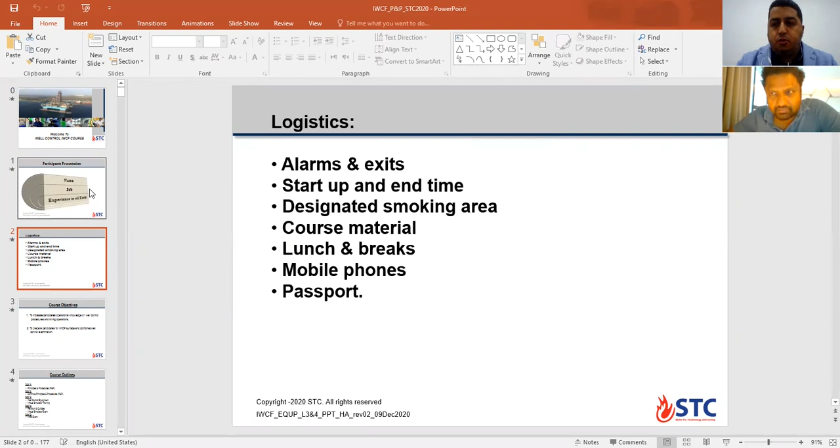What is the course objective? Why do we deliver or attend this course? First, to increase candidates' operational knowledge for well control procedure and killing operation: how to put the well under control, how to kill the well and resume our normal operation.

Second point, to prepare candidates for IWCF surface. Our course is talking about surface and combined well control examination.

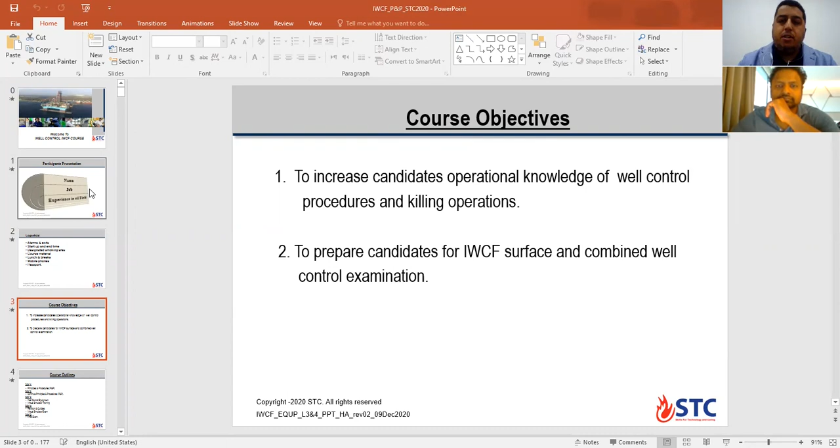Course outline: Day number 1, it will be today for principle and procedure. Day number 2, it will be continuing for principle and procedure. Day number 3, well control equipment. We will have virtual simulator training, well control simulator.

Day number 4, it will be revision and quizzes here in class, virtual simulator exam, and you have the simulator exam, you need to pass also with the same percent, 70%, to get your final certificate along with the written or online exam. Day number 5, the last day, it will be the final exam. And I think your exam will be online, right? Yes, it will be online.

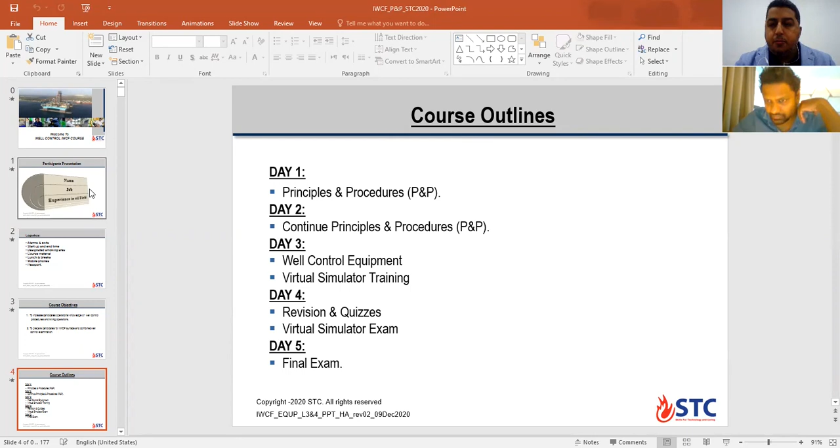First point, we'll talk about principle and procedure, well control barriers. Most of us, or you, are working on a drilling site or drilling rigs, so you know about what is the kick and the blowout. This is the definition, almost the most common definition you can hear at the rig site. What is the kick and what is the blowout?

What do you think? Kick is an influx, a blowout is an uncontrolled influx. Yes, thank you. Kick is an influx of formation fluid entering the wellbore and causing the well to start to flow. In this case, your formation fluid can be oil, can be gas, or a contamination mixture between oil and gas, or it can also be formation water. So the water can also be a kick.

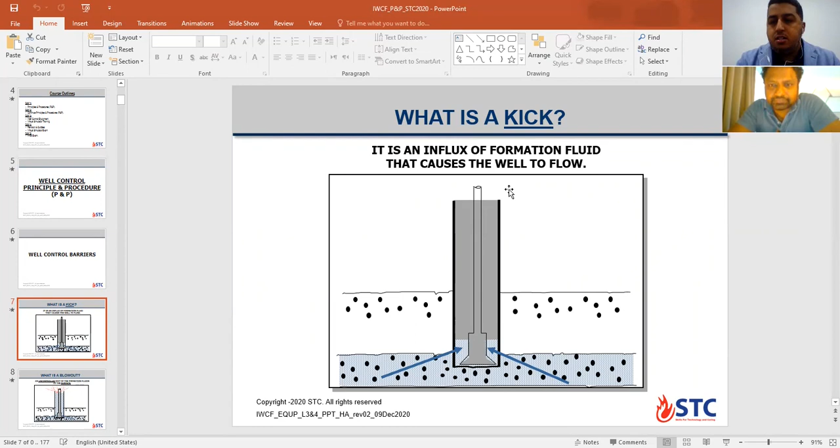Understood. Why does the fluid start to flow into the well? Because your hydrostatic head for the mud becomes less than the formation pressure. So the influx will be inside the wellbore, but still under control. So you can close your BOP stack at the surface, you can read the pressure at the surface, then you can convert this pressure to an increase in mud weight, and you start to kill the well.

The blowout is an exit of formation fluid reaching the surface, so it is out of control. It is an uncontrolled exit of formation fluid reaching the surface. You try to close your BOP stack, you have a failure in the BOP stack to control the pressure, so the oil and gas reach the surface without control. In this case, it is called a blowout case.

Normally, not all kick situations can lead to a blowout. According to experience in the oil field, only 10% of kicks, if not dealt with or handled properly, can result in a blowout. The most notable blowout in almost 11 years was the disaster in the Gulf of Mexico, the Deepwater Horizon semi-submersible.

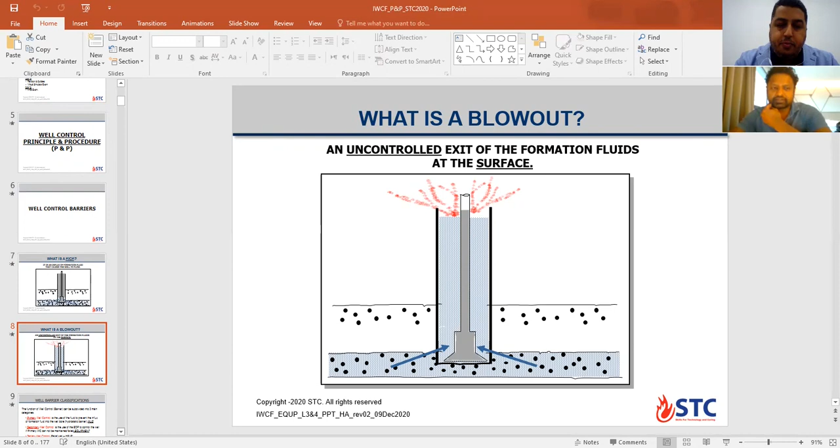What is the barrier classification? Here we talk about barrier, something that can prevent flow from the formation. It can be divided into three main categories.

First category, primary well control barrier, which is the fluid or drilling mud that prevents the influx from the formation coming inside the well. This is called fluid barrier or hydrostatic barrier. Usually when drilling with mud, the weight or hydrostatic head of the mud gives you pressure higher than your formation pressure.

By minimum, according to API, American Petroleum Institute regulations, you need a minimum of 200 PSI over balance. In some company policies, they put more than 200 PSI depending on depth of the well, porosity and permeability of the formation, type of well, deviation, temperature downhole, and a lot of considerations.

If the primary well control barrier fails, you switch to control the well with the secondary well control barrier. This piece of equipment is called BOP, or blowout preventer. You will shut in with pipe ram or annular to stop the flow and control the kick. At that moment, you record pressures at surface and convert these pressures to mud weight, increase your system with kill fluid, and start to kill the well with one of the killing methods we'll talk about later.

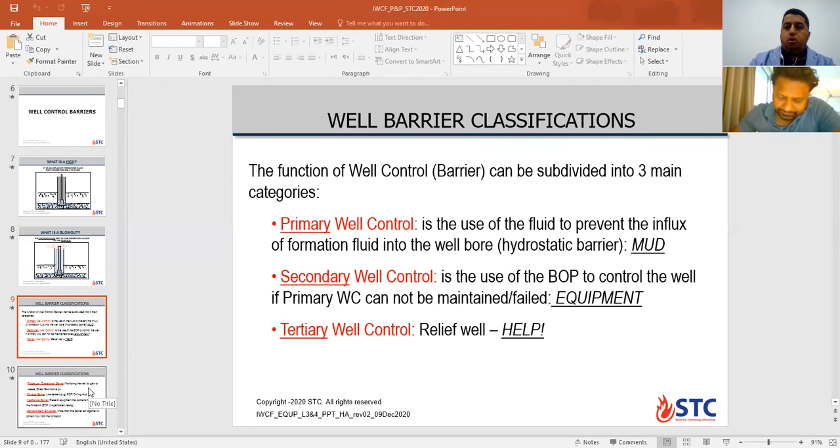Here's another classification, called procedure or operational barrier. When you monitor the well for any gain or loss inside your tanks, checking active or gain in the tank, this is called operational or procedure barrier for your mud system.

Physical barrier, from its name, is something you can see or touch physically, like a cement plug, BOP, or drilling mud, if you can see it at the surface and the level is static. Mechanical barrier is a piece of equipment that contains the flow from the formation, like BOP or unperforated casing.

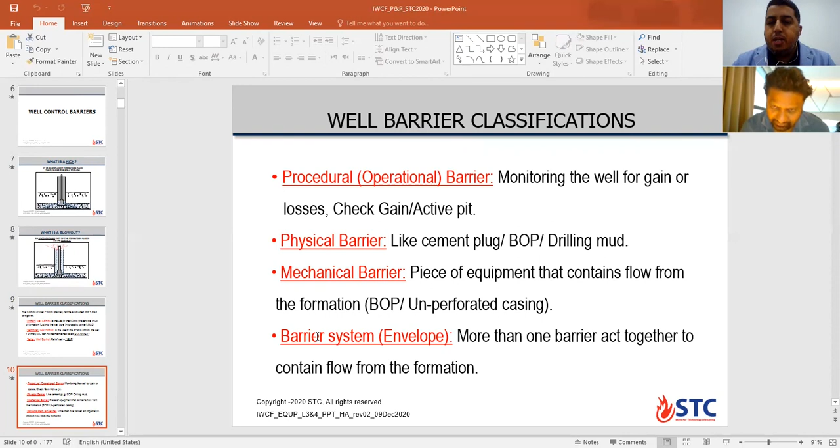Barrier envelope, what is the barrier envelope? This is a combination of more than one barrier acting together to contain the flow from the formation. Like when drilling, you have the hydrostatic head of the mud, and you have BOP as secondary barrier. The same applies if you need to, for example, change the ram in the BOP. So you need to have one mechanical barrier plus your hydrostatic head for the mud. In some companies, they add more barriers. This is the minimum requirement for barriers in place.

How can we pressure test the barrier? The barrier will not be acceptable until it passes the test criteria or test requirement to be considered a barrier. The BOP on the rig, if placed above the wellhead, cannot be considered a barrier until it passes the test procedures.

What is the way to pressure test the barrier? You have two pressure test types: one called positive test, and another called negative test. The positive test, you apply an external source pressure on the surface side of the barrier, like a cement block or BOP, more than from the bottom, from the formation side.

At that time, your surface pressure plus your hydrostatic head column above the cement block in the well will be more than the formation pressure. So this way is called a positive test. You need to hold the pressure for at least 10 or 15 minutes on the chart to ensure the barrier is holding, so you can continue your operation.

In the other way, the negative test, sometimes called an inflow test, or in some companies a dry test, you do the reverse. You apply pressure from the formation side, which will be higher than the hydrostatic head of the mud above the barrier. So this type is called negative test.

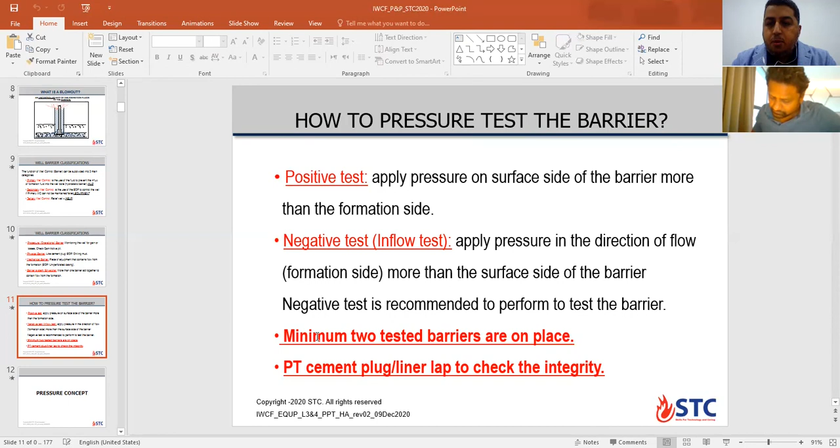We'll move to talk about pressure concepts. What is the pressure we need to talk about? First, we'll talk about hydrostatic pressure, HP. The hydrostatic pressure equation, the units for this course, pressure will be in PSI, pound per square inch, equal to mud weight in PPG, pound per gallon, times TVD, true vertical depth, times factor K, which is 0.052. This equation you will find in your formula sheet.

Could you check your formula sheet? This is the first equation in the formula sheet, first page, number 1. Equation number 1, yes. Hold on. Yes, correct, number 1. Okay, number 1 in the formula sheet: pressure equals 0.052 times TVD in feet times mud density.

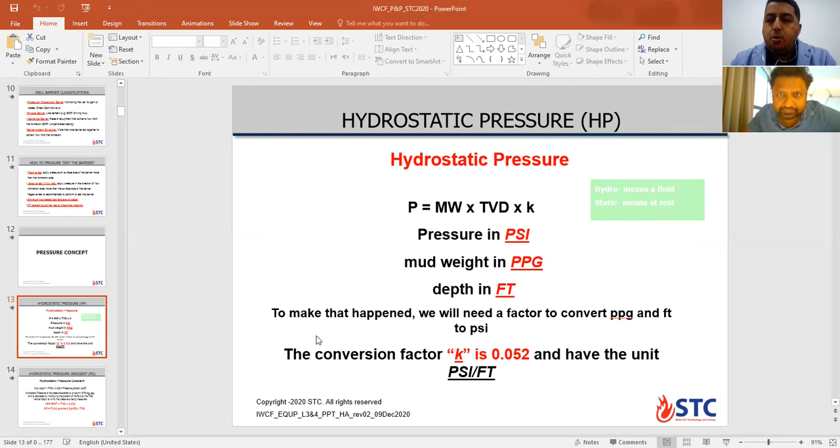This is during the static condition, without the pump running. So if you need at any point to measure your hydrostatic pressure, you need to know only the true vertical depth, not measured depth, related to the pressure using 0.052 and the mud weight in the well.

Here we'll talk about hydrostatic pressure gradient. The gradient means the last equation, both sides will be divided by foot, so we'll get pressure for each foot of true vertical depth inside the wellbore. This is the second equation: pressure gradient equals mud density times 0.052. The unit for pressure gradient is PSI per foot. This is a general equation. If you put in the fracture gradient, you will get the mud weight equivalent to the fracture pressure.

If you put formation gradient in equation number 2, you will get the mud weight equivalent to the formation. So it is a general equation. Okay, yeah, it's correct.

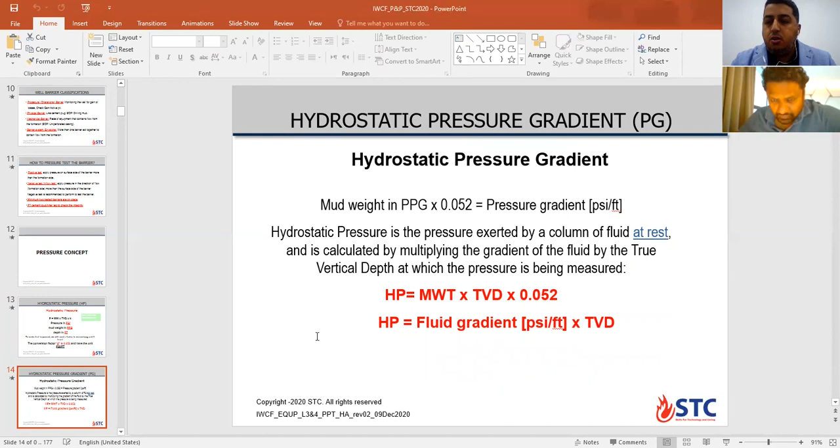If I give you PSI per foot times foot TVD, you will get the pressure at each point inside the well. This is the true vertical depth, the vertical distance between two points regarding the volume inside the containers for the well or the shape of the well. So if all the containers are filled with the same fluid density, at the same depth, you will have the same pressure at that point.

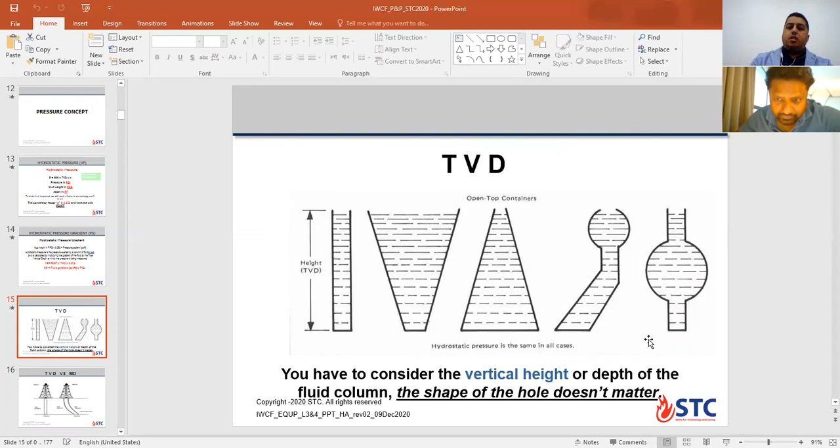Same pressure, yes, correct. This is the difference between true vertical depth and MD, which is measured depth. The measured depth, for sure, in a highly deviated well will be longer than the true vertical depth, because this is the length of the pipe lying on the side of the well. So the measured depth we usually consider when calculating volume, strokes for the pump, and time for circulation. But true vertical depth we only consider for pressure calculation.

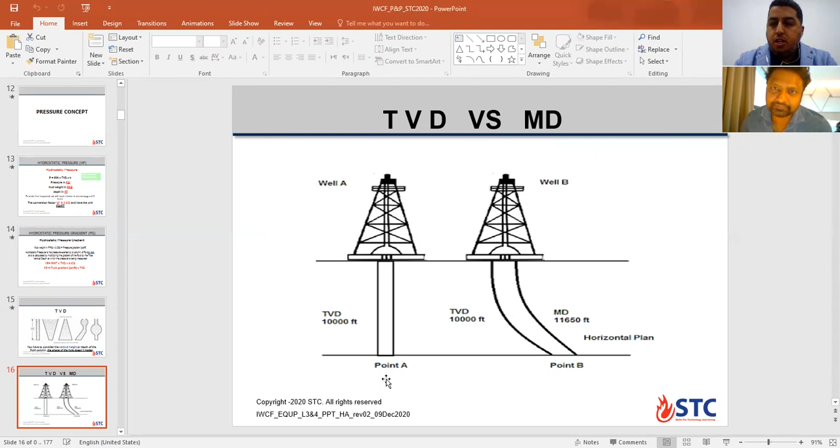Okay, pressure, yes. Let's look at this exercise or calculation. Example number 1: 10 ppg given, calculate pressure gradient. So it will be 10 times 0.052, giving you 0.52 psi per foot.

Example number 2: given to you at 8,500 foot TVD, pressure gradient 0.65 psi per foot. Can you calculate the mud weight? Yes, from equation number 2, the mud weight.

Number 2, hold on, hold on. Mud weight is equivalent to, so you just turn it around. So pressure is 0.65. Hold on, wait, just give me one minute. Yeah sure, you try.

Pressure is equal to mud weight times 0.052, right? So you want the pressure is given, you said 0.65 psi per foot. This is pressure gradient.

0.65 times 8,500, so you get pressure 5525... equals to 10 times, oh hold on, I'm confused now. Wait, okay, so pressure gradient, 0.65 times 8,500, we will get 5525 psi. That is the total hydrostatic pressure at this depth.

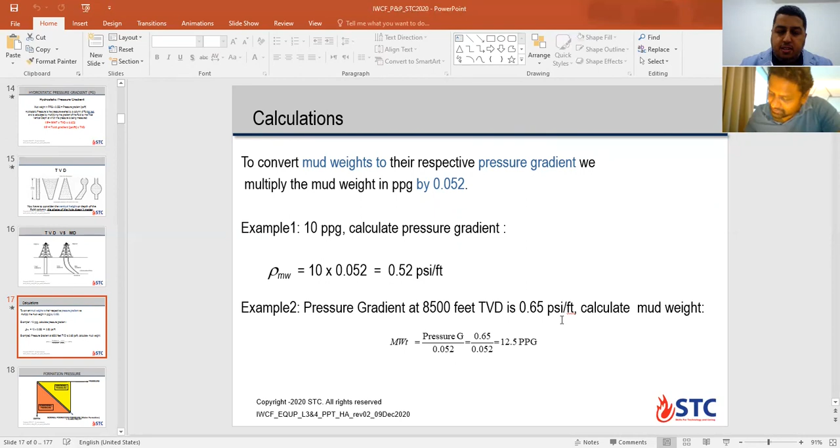Yes, okay, correct. Okay, what is the formation pressure? What is the definition of formation pressure? If we said formation pressure at this zone is 2000 psi, what is the meaning of 2000 psi?

Usually 90% of formations worldwide is water, or salt water, formation water. So we drill to get oil and gas from only 10% of the formation worldwide. So according to calculations or measurement, the normal formation pressure, which is the water formation or salt formation, equals...

Its gradient is 0.465 psi per foot. This is the gradient. If you are going to drill at any area with formation pressure higher than this value, its gradient higher, your formation will be considered abnormal pressure - the yellow area here, abnormal formation pressure. If your value is less, it will be depleted, a weak zone, or subnormal formation pressure. Yes, so this is our reference.

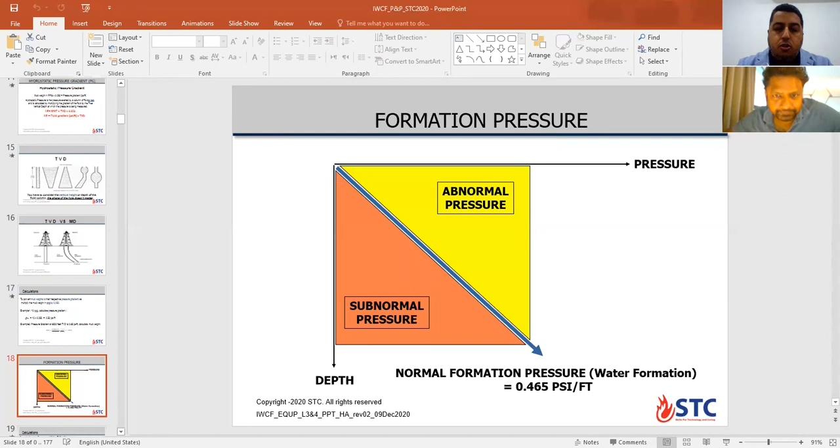The measurement or the average for this value is taken in the Gulf of Mexico, in the US. Okay, so let's look at this calculation, example number 1, please.

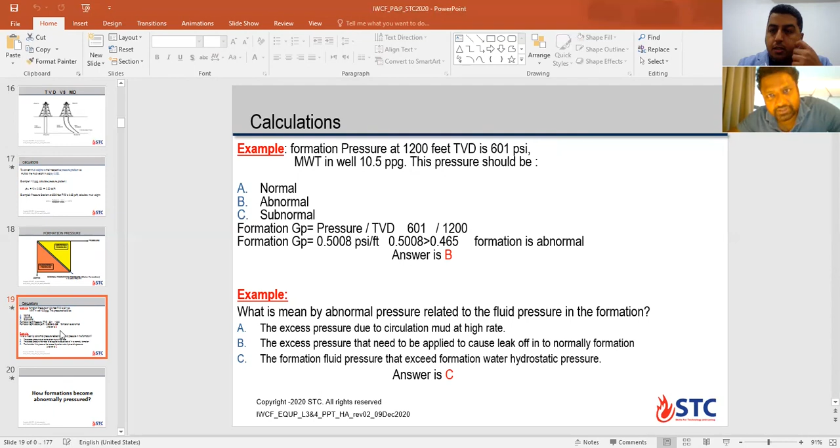The formation fluid pressure exceeds the formation water hydrostatic pressure, which is the normal formation pressure. What can happen to the formation to convert or change from normal formation water pressure to abnormal formation pressure?

Its pressure will increase. What condition can cause this? This can happen according to geological conditions, or earthquakes or something like this - so no force from humans. This can happen naturally.

Converting your formation from normal formation water pressure to abnormal formation pressure is the first reason for a kick, because increasing formation pressure decreases the overbalance in the well - leading to an underbalance or kick situation. So what do you think is the reason for that?

Trapped formation water, trapped gas, overburden pressure, different kinds of sedimentation, pressure from different reservoirs overlapping, like connate water or ancient water systems such as brine inside the formation, plus gas and hydrates.

The first worldwide reason is under-compacted shale or sand. If you look here, the formation here is formation water.

Normally, with increasing depth and compaction, pressure builds inside the pore space, so the water starts to release to the upper formation from the pore space. This is called the dewatering process. But if you have a sealed area like this one, you will trap the formation water below this seal.

So if your gradient trend, like here the green one, is normal, at this point it will increase in trend and convert to abnormal formation pressure - this is the abnormal pressure gradient, correct.

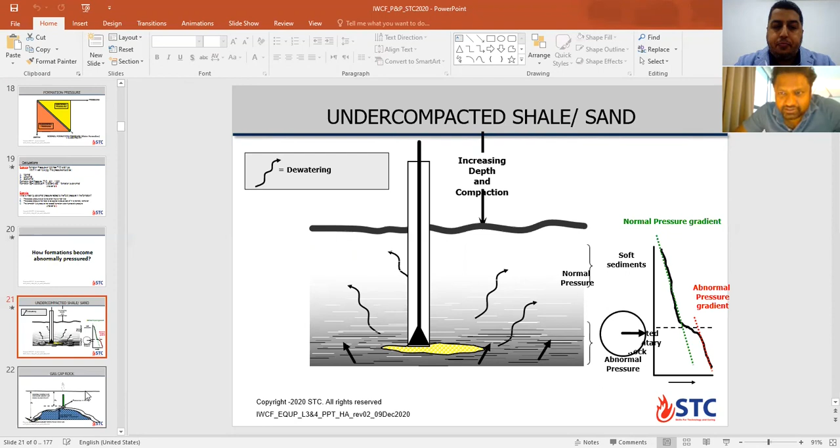Second reason, as you said, is the gas cap rock. This comes from seismic survey or exploration - you have a natural sealed area or gas cap in the rock, and the cap rock here.

So the gas inside the formation, according to its density, is lighter than the formation, so it migrates up to the top where the cap rock. The formation from below or around starts to compress this gas to a maximum at the top point.

If you put your rig here and drill in this area, your formation equivalent is 0.465 psi per foot, normal formation pressure, so you need your mud weight equivalent to this value.

But if you put your rig here and try to penetrate the gas cap, you need to check what the pressure is here, which is the maximum pressure at the top of the gas cap, and increase your mud weight according to that pressure value.

This is one question for level 4 in the exam: you get the pressure at the bottom of the gas cap first, which is normal formation pressure, then get the pressure inside the gas cap area, using an assumed gas gradient of 0.1 psi per foot multiplied by the height of the gas cap.

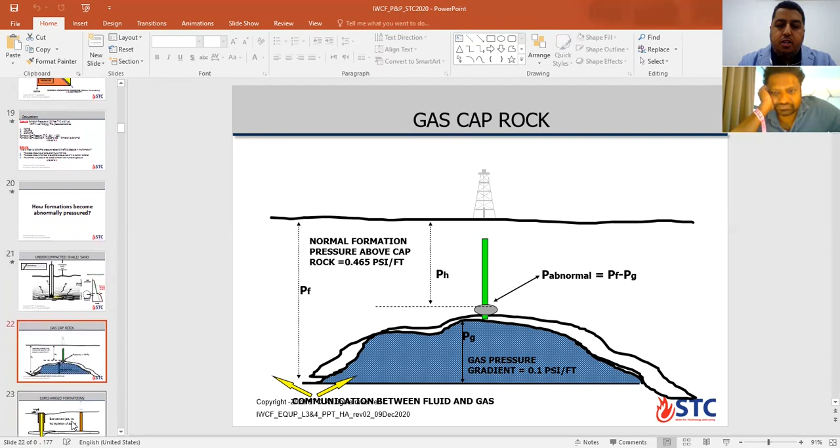The third reason is called surcharge formation. From its name, something is charging the formation. If you drill one well and complete producing from it, this is the first well in the area.

So if you have a bad cement job in the last casing behind the formation, and you have the lower formation higher in pressure than the upper formation, the white one, this lower formation will start to communicate or charge the upper formation with pressure.

So if you are going to drill another well in this area, you will get high pressure when you drill this zone because its pressure becomes charged. So this is a cause for a kick situation.

Abnormal pressure. For example, if this pressure is 2000 psi, its equivalent mud weight is like 8.9. If it's charged to 2500, you need to increase mud weight to overcome the kick situation.

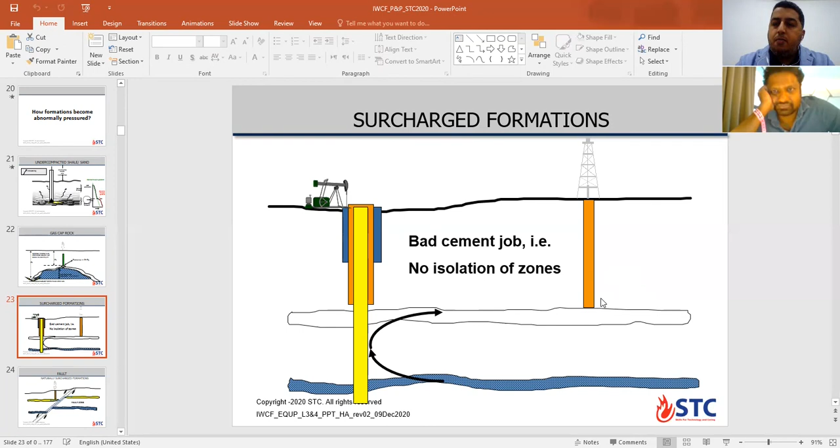Correct. Another natural cause is called fault. From earthquake or movement of the earth, or tectonic movement, you have a fault in this area. So the formation will become shallower in depth with its same pressure inside.

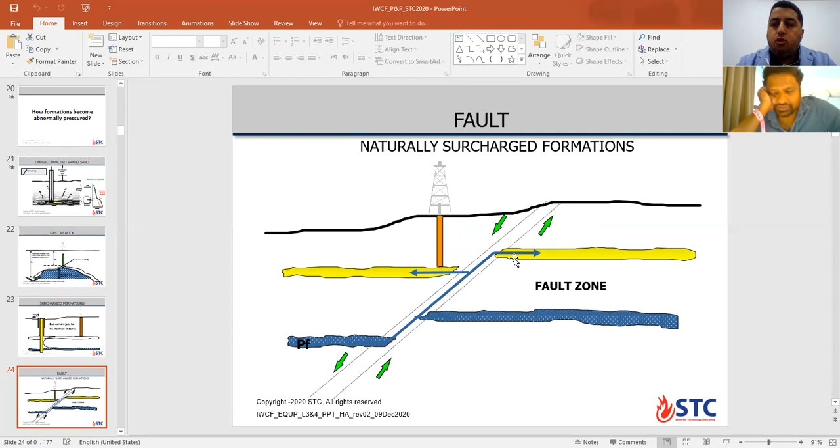So you need to consider this when you are drilling in a fault area. If you know this area has a fault, you need to keep your kill mud weight ready in the system while drilling through this transition zone or fault, to not take any kick or blowout situation.

The last reason here is the artesian well. What is the artesian well? You know? No, not really, artesian, no.

Okay, you have a connecting zone, a high porous sandstone. There is a continuous source for water, like a lake or rainfall. So this lake charges your formation, connected to downhole with pressure.

And your rig level is lower than the level of the lake. So all the time you cannot overcome this difference between the two levels. So if you are at this head...

So if you are going to drill in this zone, you will naturally get flow of water from the formation. So what should you do? You cannot work this way, you cannot drill a well with kicks all the time from this zone. So you should take action. How can you solve this problem or issue?

If you can drill through this zone, drill through this section, and then go to the next section. So you can first consider running cement shallower to cover this zone. Okay, this is one solution, drill through.

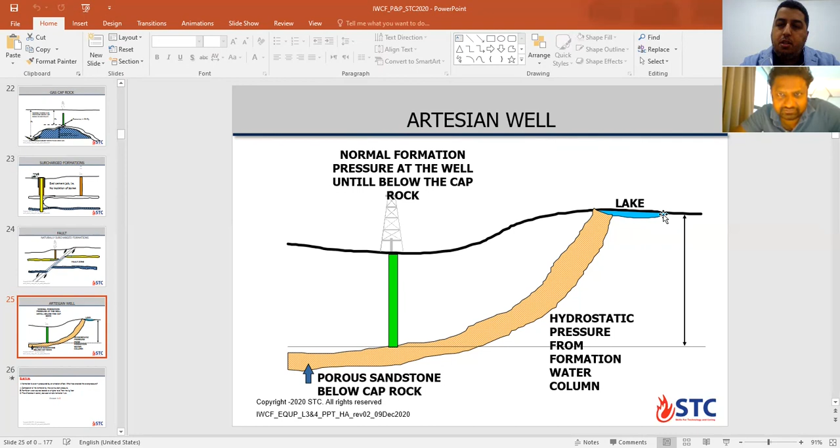Okay, look at this example.

Usually, the water source is located higher - this is the artesian effect, and the answer is B. In an IWCF exam, you may get multi-choice questions with 2 or 3 correct answers. For your information, if you only select some of the correct answers and miss others, you get 0 score - you need to answer all correct ones for full credit. This is why we need to focus on multi-choice questions with 2 or 3 answers, because if you have 3 possible answers and get 2 right but 1 wrong, you will not get any score. You will get 0.

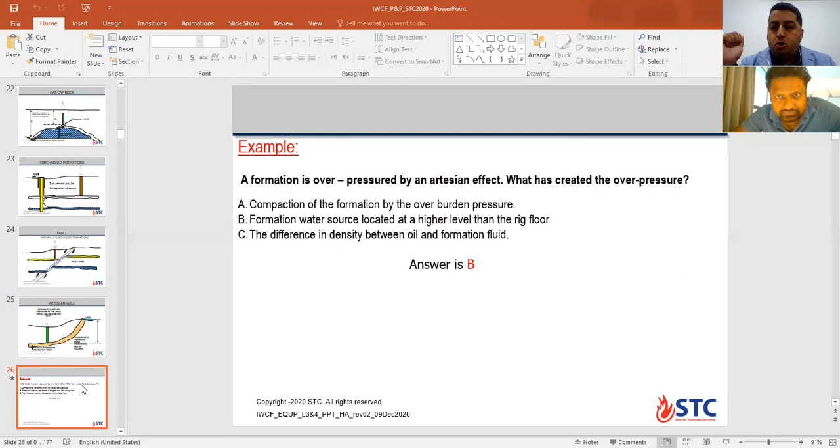After that, we'll talk about formation characteristics or properties. The first one is porosity. What is porosity? It's the porous media, or how much volume inside the porous space can fit fluid. This is the percentage between the volume of voids inside the rock divided by the total volume of the rock, including grain and porous space, usually expressed in percentage.

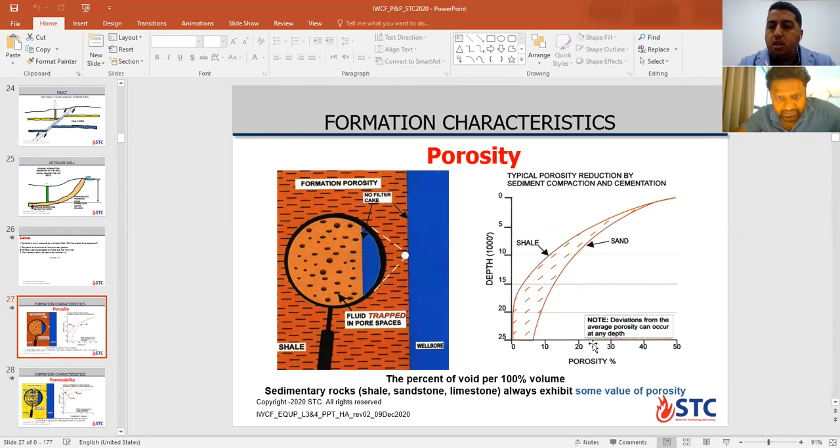If you look at this graph with depth, what happens to the porosity? When you drill, it will reduce because of cementation and compaction. If you look here, you have shale and sand. At 10,000 feet, your shale porosity is less than your sandstone porosity. That's why we can produce from the sand and cannot produce from the shale - because shale has high porosity but low or zero permeability. That's why it's a trap formation.

Another characteristic of the formation is permeability - how much the porous space is connected to each other. It's the ability for fluid to move through connected porous space into the wellbore. The same as porosity, with depth the permeability will also decrease. The permeability unit relates to a unit called Darcy, or millidarcy - named after the scientist who discovered and researched the permeability concept. With depth, at 10,000 feet you will have shale with 0 permeability, but the sand will still have porous media.

Why do we need to know about porosity and permeability in this course? This is a well control course, not a production course, but we still need to know about porosity and permeability. Why? Because you need to design your casing points, your fluid type, your mud weight, and other design factors. If it's permeable, you can lose fluids or cement. If it's porous, the same applies. And if it's permeable, you can have a connection between anything in the reservoir and your wellbore. This is good for well design and engineering courses, but not specifically for the well control course.

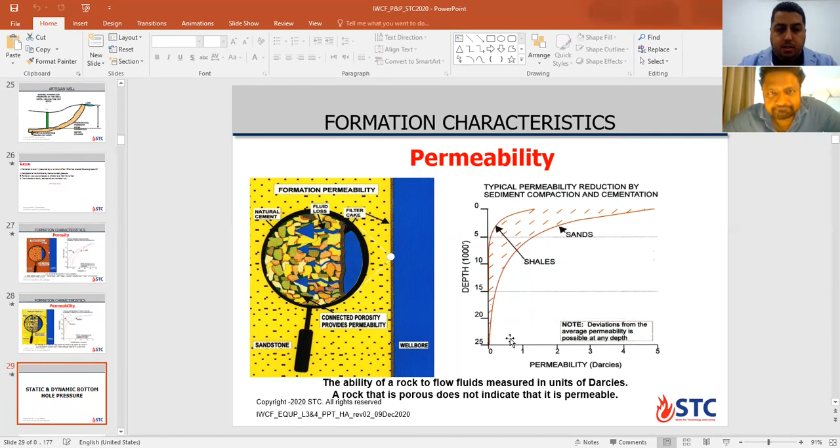After that, we'll talk about static and dynamic bottom hole pressure. When you start or stop your pump, what is read at the bottom hole of the well? What is the meaning of bottom hole pressure?

Bottom hole pressure is the pressure exerted at the bottom of the hole because of the drilling fluid column. Any pressure exerted on that column with your pump switched on is dynamic, but static is with your pumps off, just the column. Dynamic is with your pumps on - the pump pressure plus the hydrostatic pressure gives you your bottom hole at the bit pressure. During static condition, it will be only equal to your column of mud weight. In dynamic, you will have annular pressure loss acting plus the hydrostatic head of the mud on the formation. At shut-in, it will be hydrostatic head of the fluid plus any surface pressure during the shut-in situation.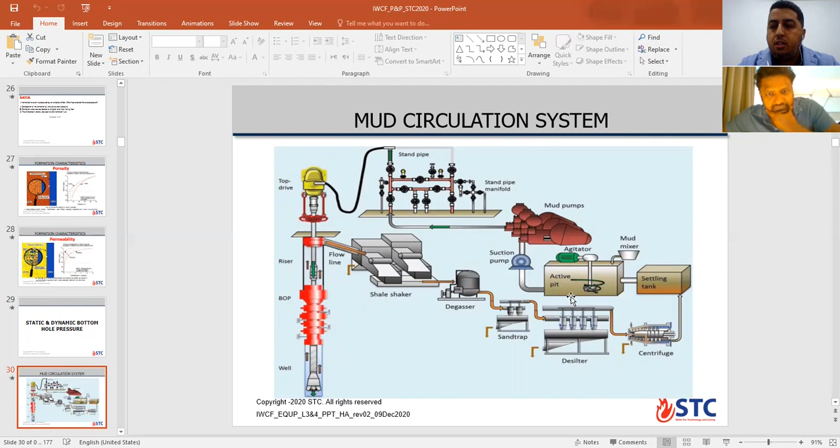This is a closed cycle to monitor any pit gain or loss during drilling operation. Here's an example: a vertical well, 10,000 ft TVD, mud weight is 10 ppg, and the pump is shut off. If I put a gauge on the bottom in static condition, what is the bottom hole pressure? Mud weight multiplied by depth, multiplied by 0.052, will give you 5,200 psi.

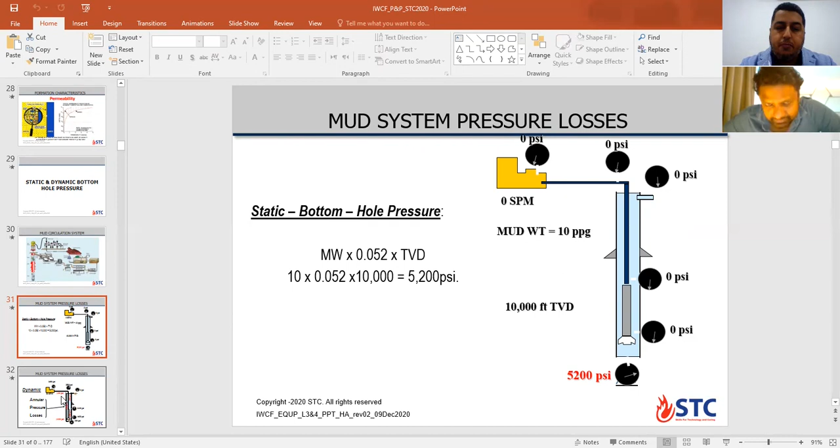If I start the pump, running at 80 SPM strokes per minute, your pump pressure now is reading 2,600 psi. I have a question: what is the meaning of pump pressure? If I said pump pressure is 2,500 or 2,000 for example, what is the meaning?

That is the gauge pressure at the pump output. That is the true value coming out from the pump. It's not including all the frictional losses down the hole yet. It's exactly at the pump exit. You're getting maximum pump pressure at the exit.

Why do we need this value? If I change, for example, the string inside the well, will this value change or not? No. Sure, your pump pressure... string volume... oh okay, no. It's a closed system, so it should not, because your output should be fixed, right?

For output, I'll ask you another way. If I have 3.5 pipe in the well and I change it to 7.8 OD, your pump pressure for circulation now, will it change or not? It will change. Why? Because your friction losses are different. Your volume has changed. So this value is related to the friction inside the system.

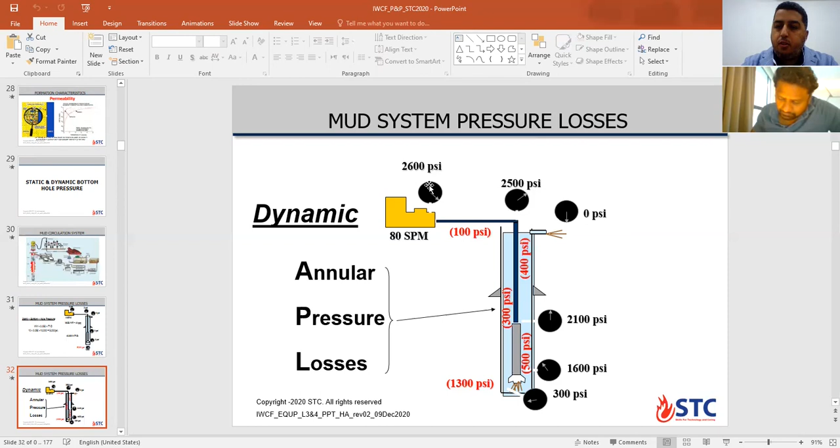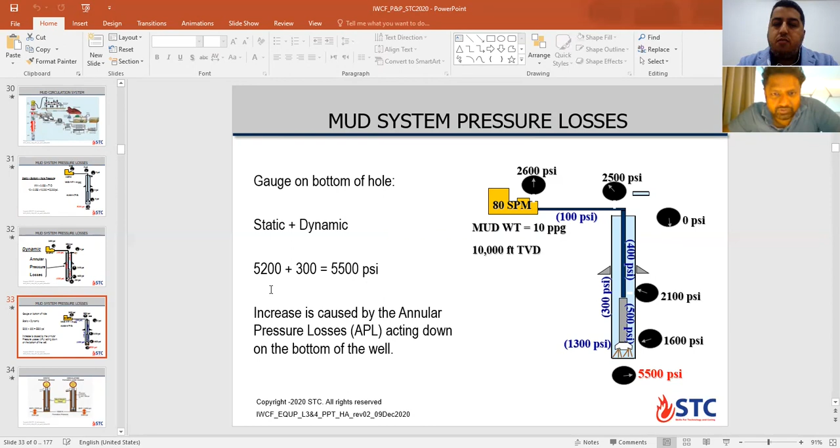I will put a gauge on this example at the bottom, and I need to know the bottom hole pressure during dynamic or circulation condition. It will be equal to the static column for the mud, 5,200 psi, plus the value of the APL, annular pressure loss. So now the bottom hole pressure for the well is higher, equal to 5,500 psi compared to the static condition. When you shut down your pump, you lose your APL, it becomes zero, so you go back to static condition, which is 5,200 psi.

Let's look at this example. You have formation pressure 5,300 psi, in the same well, two conditions: one static without circulation, one dynamic. Bottom hole pressure here equals 10,000 feet times 10 times 0.052, which is 5,200 psi. The annular pressure loss given is 250 psi, so the bottom hole pressure becomes 5,450 psi.

The first situation, on the left, with zero pump pressure, the well is under kick situation. But when you start your pump at 3,000 psi and it's running, your bottom hole pressure is under control, no kick situation. The reason is the additional pressure from the equivalent circulating density, the ECD, is higher with your pumps on. When you start your pump, you have friction in the annulus, called APL, acting with more pressure on the bottom of the well. That's why when you are drilling, your tank at the surface is static, no loss, no gain. But when you stop your pump during drilling for any reason, you can see flow.

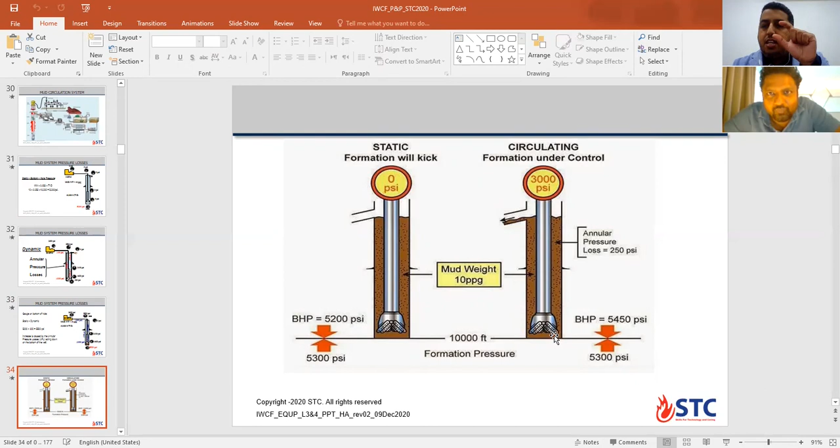From this point, you will have another definition, called equivalent circulation density, or ECD. This is the equation you will find in the formula sheet, equation number 7. Equivalent circulation density in ppg equals original mud weight plus the APL value converted to mud weight, divided by TVD for the well, times 0.052.

According to well control or the IWCF, if you are going to write the final answer for mud weight, you need to have only one decimal after the point mark as a final answer. You can round up or down according to what you are calculating. Now we are calculating ECD, so what do you think, round up or down? I will round up, because I will give myself some margin in case of any losses or friction losses, so you need to be overbalanced over the formation pressure and stay on the safe side, you have a safety factor.

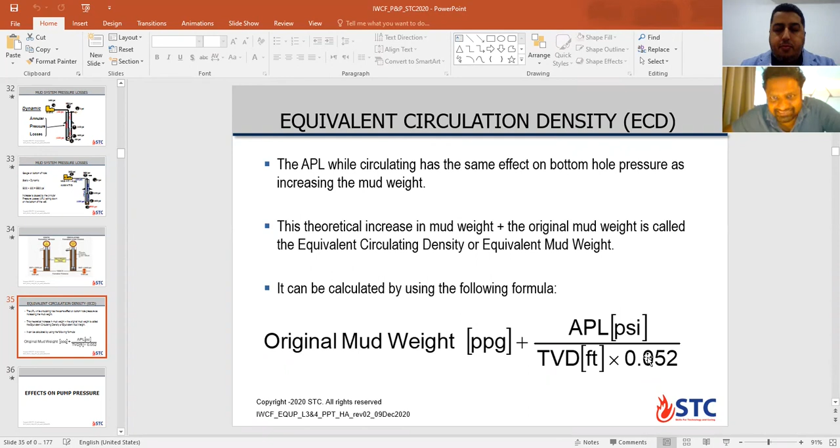Effect on pump pressure. What parameters can change and affect the pump pressure value? It's changing for mud weight inside the well.

What do you think if I'm asking the mud engineer in the rig to increase the mud weight from 10 ppg to 11 ppg? What will happen to the pump pressure during the cycle after circulate? It will go up, because mud weight means more viscosity, so more friction, so more pressure at the pump. Correct. The equation for that one: P2, the new pump pressure, equals P1 old times new mud weight divided by old mud weight.

Okay, this is equation number 10. It is slowly coming, very slowly, as you are talking. Yeah, one by one, but you still have some memory for that from the course.

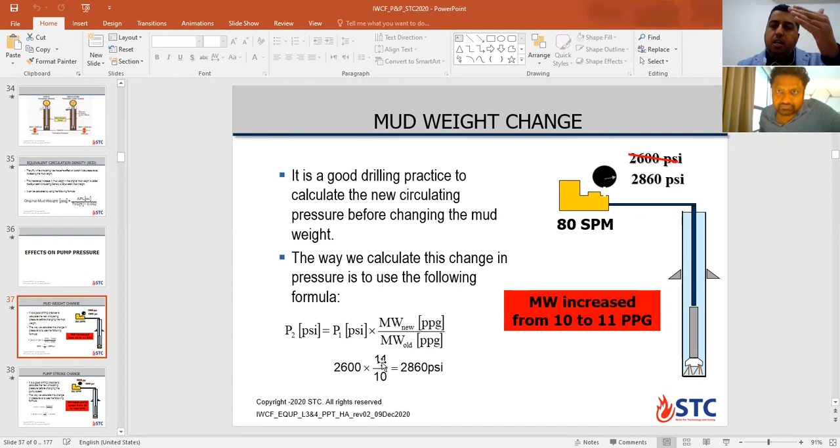But here the pump pressure is not a critical value. The critical value will be for kill or fracture pressure.

Another parameter: you will change your stroke for the pump, increase or decrease your pump rate. What will happen when you increase your strokes for the pump? That means more input in the well, more output, more friction in the system, so for sure your pump pressure will jump up or increase. The approximate equation here: pressure new equals pressure old times stroke per minute new divided by stroke per minute old, all squared.

This equation will be number 9. Here we hold the mud weight constant, it will not change, and the strokes per minute old value is constant also. We play only with one parameter. So can you also calculate that?

Take 100 divided by 80, square it, then multiply by the old pressure, which is 2600. That gives 4062.5, so 4063 psi.

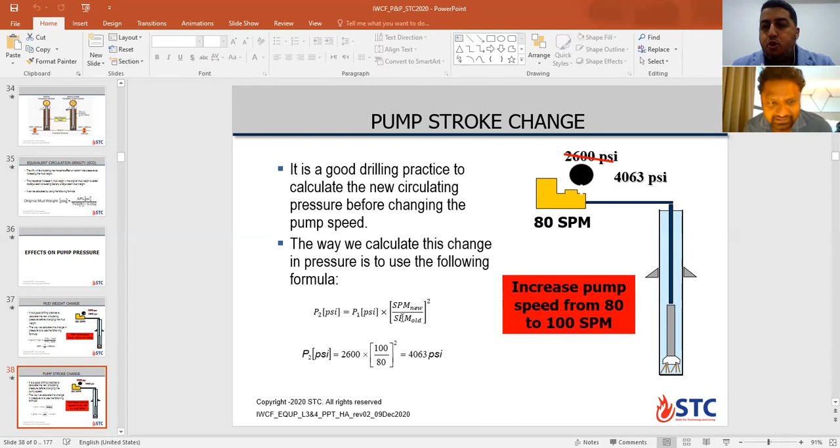So that'll be too high. Yeah, you can try this. This equation comes from trial in the actual location. That's why it's called an approximate equation.

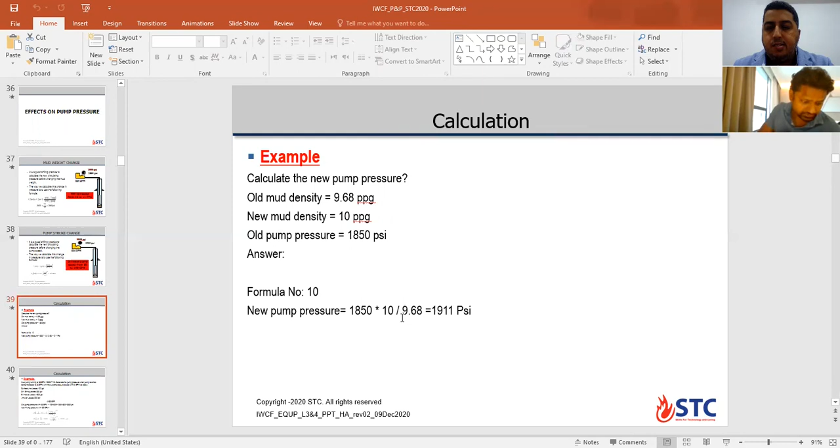Look at this example: calculate the new pump pressure from the old mud density, new mud density, and old pump pressure. So it's the new mud density divided by old mud density, times the old pump pressure of 1850, giving 1911 psi.

Second one: mud pump running at 30 SPM, 10000 TVD. Calculate pump pressure when the pump rate has been increased to 35 SPM, with the system pressure loss at 30 SPM below surface line being 100. So you take 30, increase to 35 — I need the new pump pressure at 35. So it's 35 divided by 30, squared.

Times the old pressure — where's the old pressure value? So old pressure value, where is the pump pressure? Hold on, so we go to the equation.

I'm missing something here. Hold on, Mr. Hani - no, nothing missing. Hold on, okay, so old pump pressure.

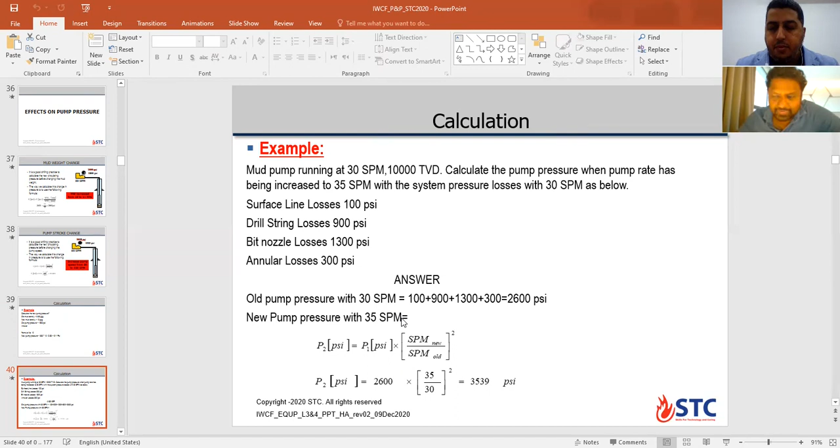After that, we'll talk about kick occurrence, when a kick can happen. The kick can happen in two conditions: when your formation pressure increases, your overbalance decreases and you can go into an underbalance situation, or your hydrostatic head column for the mud is reduced for many reasons.

Here we'll talk about what can happen for the fluid column to be reduced. What is the reason to reduce the hydrostatic head for the mud? What do you think?

Losses is one. Does any type of loss lead to a kick situation? Yes, definitely - but not all. If you have a higher pressure zone above your drilling zone, and you're losing at the bottom, and

you're going underbalance above, you can introduce an influx. So not all - it depends on how much you lose your level inside the well, compared to the formation pressure value. Correct, okay, so this is the first reason - the losses.

Okay, what else? Failure to keep the hole full, gas cut mud - you know, you have gas coming in, your mud weight is not true at the bottom anymore. Your 10 ppg is now becoming 9.5 ppg because of gas in the mud. What else? Formation fluids - same thing as gas, lighter fluid coming in.

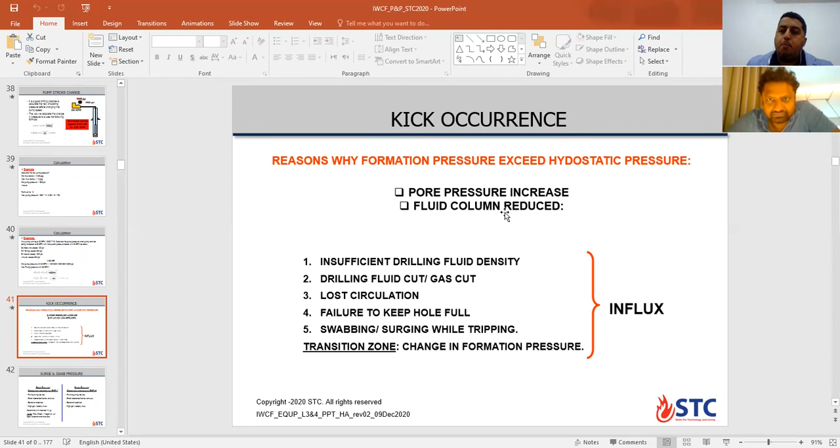About surge and swab pressure: swab is usually called negative pressure, a momentary reduction in bottom hole pressure. The reason is pulling out too fast, or having a small clearance between the hole and your bottom hole assembly. For your information, swab can happen in open hole and also inside cased hole.

You also have a balled bit or stabilizer, and you have high gel or viscosity mud. The high viscosity mud will not give time for the mud to come and fill the void space around the pipe.

How can you determine if you have a swab inside the wellbore? For example, if you're pulling out of hole with 5 stands, the hole is not taking enough fill if you pull too fast, because the fluid from the trip tank is not going in fast enough.

This is determined by incorrect fill up. For example, when pulling out of hole, if your trip tank was 50 barrels, after 5 stands you must fill the hole with, say, 5 barrels. If the tank reads 45 barrels, everything is fine, the hole is static. But if you pull 5 stands and your tank is only 47 barrels, that means it took 3 barrels instead of 5 to fill the hole. In this case, you know you have a swabbed kick or swabbed gas inside the hole or wellbore.

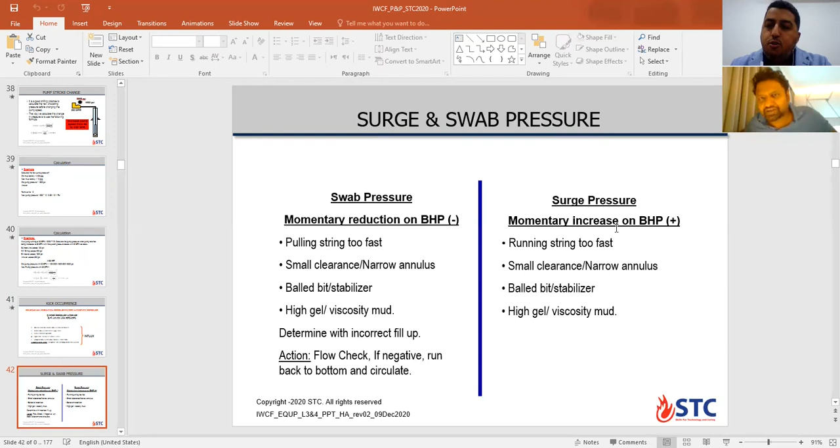No, it's not good. You will fracture the formation. If you have a loose zone or weak zone, you will exceed the fracture pressure, fracture your formation, and have losses. From losses, you have a drop in your hydrostatic head, and then you may go underbalanced and have a kick. That's why surge and swab are related to kick occurrence.

Okay, now we'll talk about wet and dry tripping. From a well control and safety view, what is the best option to go out of the hole, wet or dry tripping? What do you think?

The best way is to trip wet. Wet means you don't slug the pipe, you don't dry the pipe. You trip with the mud in the pipe and pull out slowly. This is the meaning of wet. Dry is when you slug the pipe and then pull. So what is the best? I think wet is better.

Let me think about wet and dry tripping. If you dry trip, you slug the pipe and pull. Then it becomes like a plug, right? You might swab. If you wet pull, your pipe is wet, so the pressure is balanced inside and outside. Am I right? So if you pull wet, it should be better. You don't swab the formation if you pull wet. If you dry the pipe and pull, you can end up swabbing the formation if you pull too fast. Actually, that's not correct.

Let's say the question was asked another way: compare between wet and dry tripping. If you pull 5 stands wet and 5 stands dry, how much mud will you lose in each case? You will lose more mud from the well if you pull wet, because when you break pipe, you will lose a connection's worth each time.

Only displacement loss, correct. But when you pull wet, you lose the internal capacity of the pipe plus metal displacement. Yes, that's two losses.

Two losses. For dry tripping, your pipe from inside is empty. So the volume you need to add from the trip tank to the annulus while pulling out, all the time, is displacement equal only to open-end or metal displacement or steel displacement, which is OD squared minus ID squared divided by 1029.4, giving you barrels per foot for the metal displacement.

Usually in the exam or exercise, the number will be given to you directly, you don't need to calculate. This is for dry tripping.

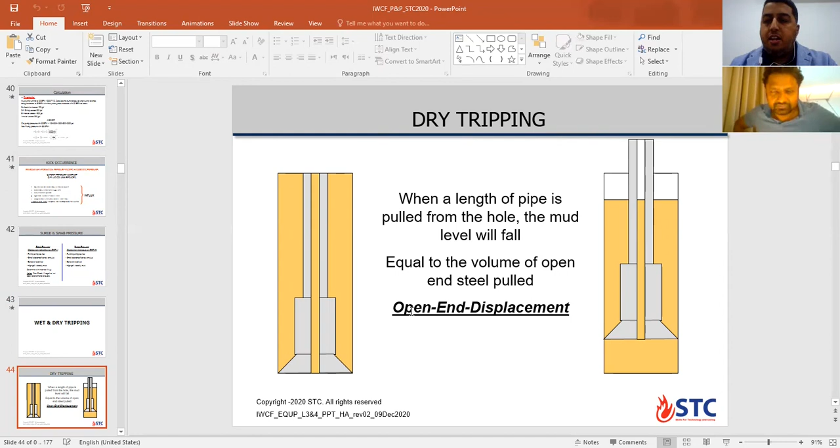Also, according to safety, it will be more safe for personnel or crew on the rig floor to pull dry, to not make the rig floor wet, so you don't break pipe on surface, especially if you are working with oil-based mud, where the risk for slippage will be more.

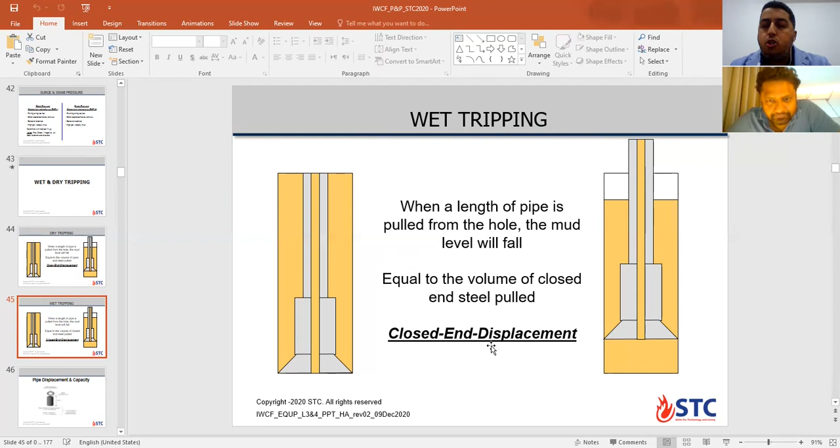For wet tripping, that means for each stand you're pulling out, you need to compensate in the well the closed-end displacement, which is internal capacity plus metal displacement. If you look here, this is the cross-section of the pipe: this is capacity for the pipe, this is metal displacement. Pipe metal displacement plus pipe capacity gives you the closed-end displacement.

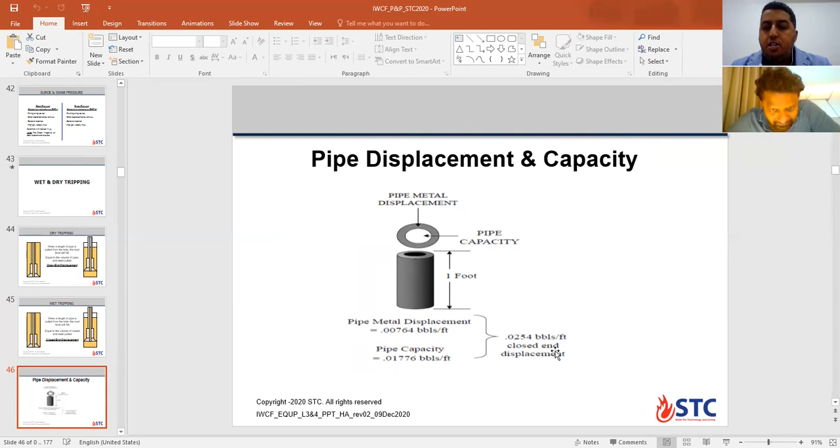Okay, closed-end displacement. Now the trip tank: this is a small tank, usually capacity 20 to 50 barrels. Usually on the rig you have two trip tanks, one for oil-based mud and one for water-based mud. The trip tank is usually running during the tripping operation.

So when you are going to trip out, you start your trip tank pump. There is a line sucked from the tank, from the fill line down to the annulus while pulling out your string, and the return or flow line brings the fluid back to the same tank. So it's a closed cycle while pulling out or tripping in, used to measure losses or gain during tripping, the same as the active tank in drilling operations.

You have measurement here to measure the float or level inside the tank. The level starts to drop when tripping up or out, because you're compensating the metal displacement or closed-end displacement inside the hole. While tripping in, the metal displacement comes out, so the level will increase inside the trip tank.

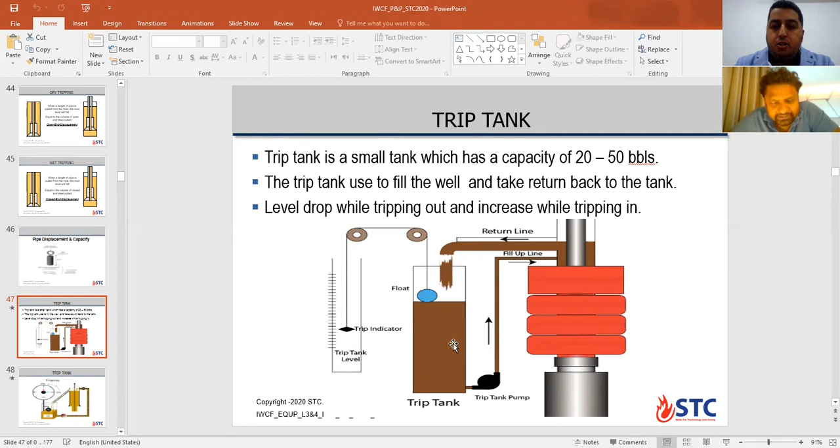From this tank calculation or measurement, the trip sheet can be used by the driller to monitor the tank during the tripping operation. For example, you are tripping out of the hole, your pump is on, all the time lined up to the annulus to fill the metal displacement, and the measurement returns to the same tank.

If you start volume at 15 and pull 5 stands out, you will lose, for example, 5 barrels, so you will finish at 10. For example, if after pulling 5 stands the driller finds the trip tank at less than 10 barrels, what does this indicate? Losses. That means more volume has been taken by the formation.

For example, if you are pulling 5 stands and this volume reads 12 barrels, what does this indicate? Kick or losses? I mean from 15, instead of dropping to 10, you drop to 12.

What does this indicate? That means you have an influx, a 2 barrel influx. Instead of filling 5 barrels, you only fill 3, and there are 2 barrels coming from the well or from the formation. This is how to measure it, or how you make your trip sheet.

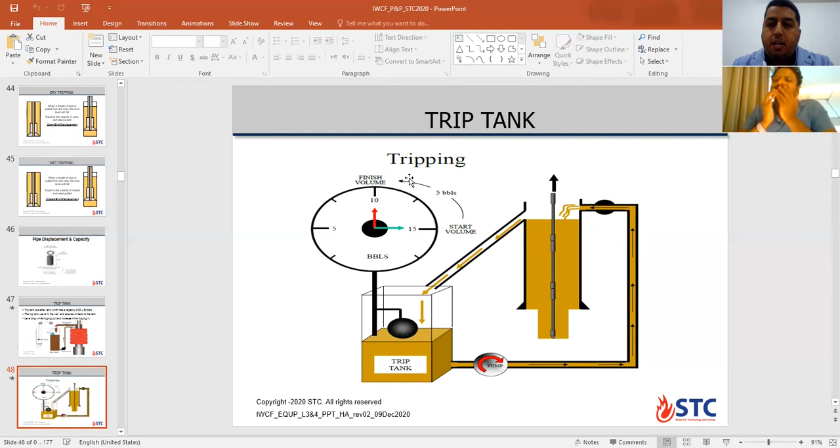But this trip sheet is very important in the rig location. It should be filled from the driller and checked by the company man and tool pusher, and filed in the rig filing system.

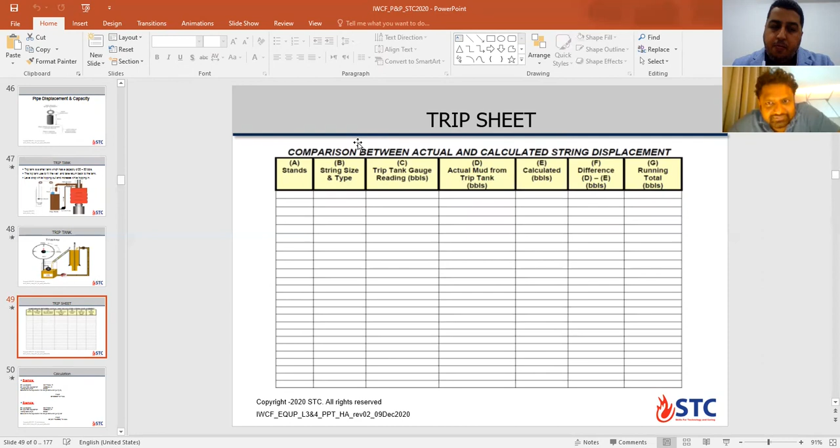Okay, let's check these 2 simple calculations. First one: calculate the mud required to fill the hole per stand when pulling dry. Pipe capacity.

So it's only displacement. So you take 93 feet and multiply by the metal displacement 0.0083. You get 0.78 barrels, 0.77 barrels, almost 1 barrel.

Example number 2. Calculate the mud required to fill the hole per stand pulling wet. So that's both, so you take...

0.01776 plus the displacement 0.0083, you get that, multiply with 93 feet. You get 2.4 barrels. Okay, if you're pulling wet.

Can you check your formula sheet, equation number 19? In formula sheet, equation number 19 is pressure drop per foot tripping dry pipe.

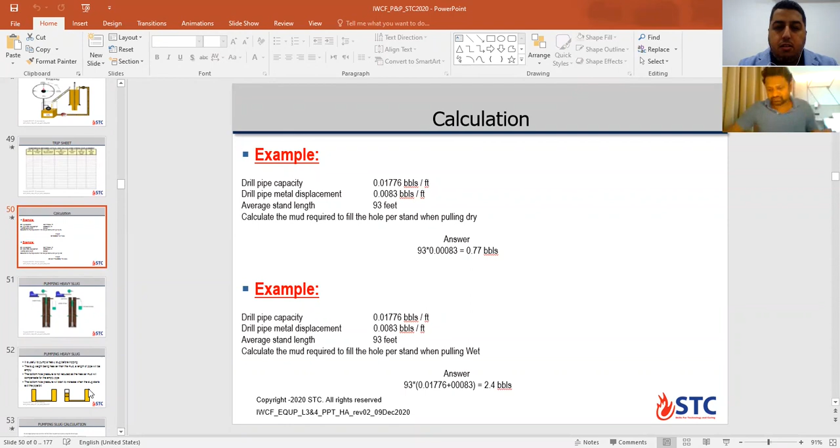No problem. So if you are drilling with a motor assembly, you have a float valve in the string. So how can you go up or trip out with tripping?

You need to pump what's called a heavy slug inside the drill string. This is the benefit of pumping heavy slug. You start to pump a length or barrel of slug, normally 20 to 30 barrels for example, which will sit inside the pipe. After you shut down the pump, you have a U-tube effect in the trip tank, calculated, and you have a level drop inside the well. At the bottom, from both sides, annulus and drill string, bottom hole pressure will not change because the U-tube makes a balance inside the well.

The increase in the slug weight will be compensated by the level drop inside the well. So there is no change in bottom hole pressure. The barrel coming out from the U-tube effect will be equal to the barrel, or the length, you lose inside the drill string.

That's why when you're pumping the heavy slug, you must do a routine flow check after you line up to the trip tank. Why? Because you know there is an increase in the trip tank, so you monitor the increase to confirm the well is static after the U-tube effect finishes, after you pump the heavy slug.

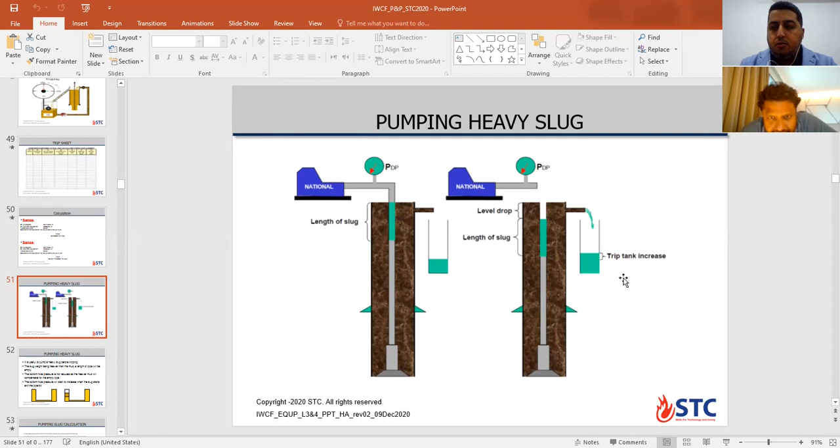It's useful to pump heavy slug before tripping. The bottom hole pressure will not reduce, as the heavier mud compensates for the empty pipe. Bottom hole pressure starts to increase once the heavy slug comes out from the bit to the top - this is the start where you see the effect on bottom hole pressure.

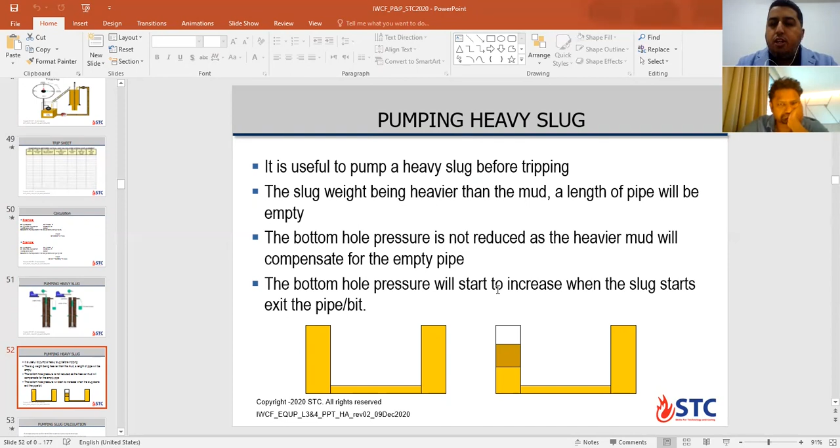For pumping the slug, you have two equations here: equation number 26 and 27. Equation 26: slug volume in barrels for a given length of dry pipe equals length of dry pipe times pipe capacity, times drilling fluid density, divided by slug density minus drilling fluid density.

Equation 27 is the pit gain from the U-tube effect, in barrels, equal to slug volume times slug density divided by drilling fluid density, minus 1. These are the two equations you can use in the exam or during calculations for pumping slug.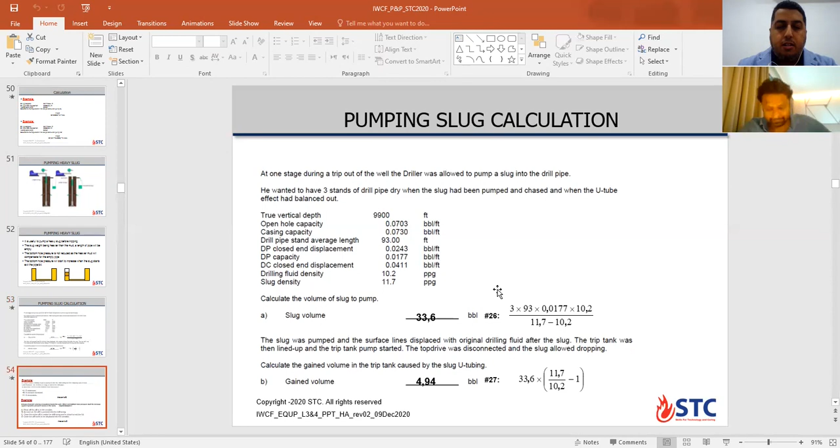Slug density 11.7 divided by mud in the hole 10.2, minus 1, times 33.58, gives 4.94 - almost 5 barrels. Okay, check these two examples.

A slug of heavy drilling mud is pumped into the drill string before tripping out of hole. After balancing, the bottom of the slug is still in the drill pipe. What is the effect on bottom hole pressure? Still nothing, it remains constant.

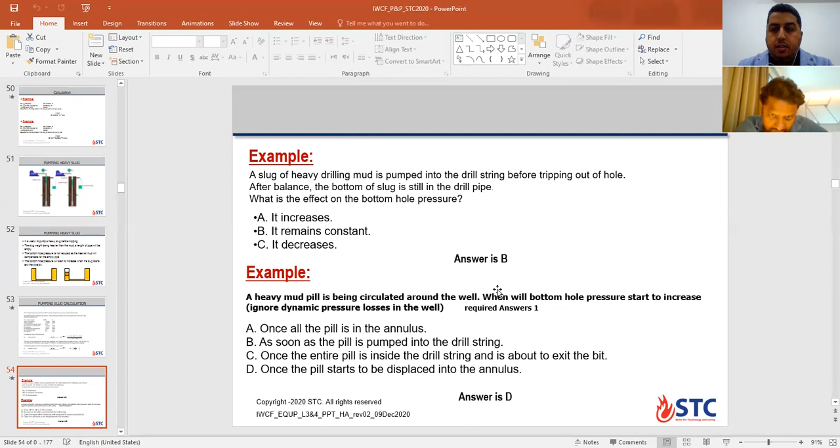Example number 2: heavy mud is being circulated around the well. When will bottom hole pressure start to increase? Once it exits the bit and the pill starts to displace into the annulus - once it goes out into the annulus, that's when it starts exiting the drill pipe at the bit.

Now we'll talk about kick warning signs or indicators. You can see these when going into the transition zone between normal formation pressure and abnormal formation pressure. The driller, during drilling operations, can notice certain parameters or warning signs. It can give an indication that you may go - not must - to a kick situation or underbalanced situation. That means he needs to increase his awareness and his crew's awareness to notice if you are heading toward a real kick situation or not.

This kick warning sign or indicator can happen during the drilling phase, or during tripping, circulation, or connection time. During drilling, all these parameters are related to the possibility that you may go underbalance - you're not sure, you may be. Sometimes this is like a warning indicator, like when you drive a car at fast speed and you see a signboard saying stop or drive slowly. If you drive fast it doesn't mean you will definitely have an accident, but it may lead to an accident situation. This is the meaning also for these indicators.

The first indicator: while drilling you will see your ROP, rate of penetration, increase. A sudden jump in ROP with the same parameters held constant - you don't increase weight on bit or RPM or pump rate. When the driller enters the transition zone, you will find ROP going fast, like it jumps from 50 feet per hour to 70 or 80. This indicates you may be going into high or abnormal formation pressure.

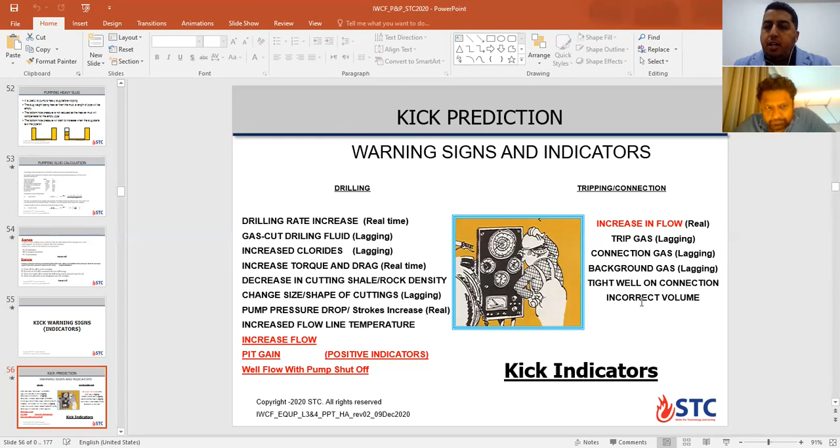Clear? Okay, let's look at these two examples please. Which of the following are indicators that a well might be going under balance? Two answers.

Example number 2. Which of the following should be considered as a kick indicator? Decrease in the drilling fluid flow from the well? No. Increase in drilling fluid density? No. Increase in solid content? No. Increase in the drilling fluid flow? Yes. D.

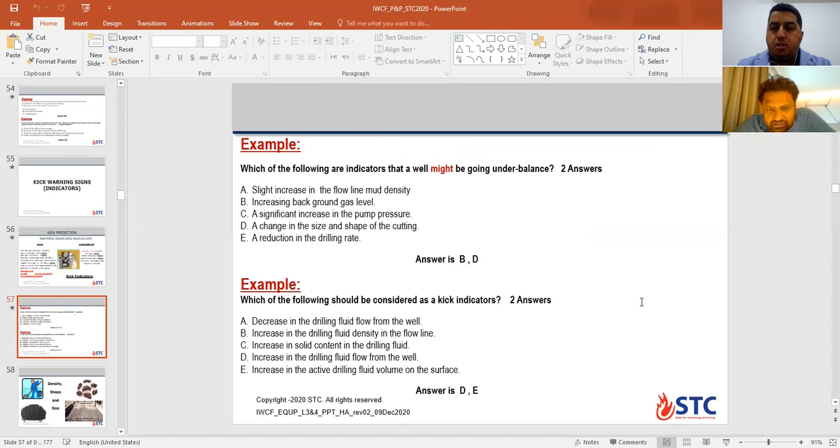Okay, D. This is a positive indicator. This one, the shape, size and volume for the cutting - in some wells I know I have a lot of cutting, that's why we said this is a warning sign only.

So monitor by shaker man all the time, as the shale shaker gives a call to the driller first. So the driller, the first man, needs to be informed of any change in mud system or in cutting size or shape to react against the kick situation.

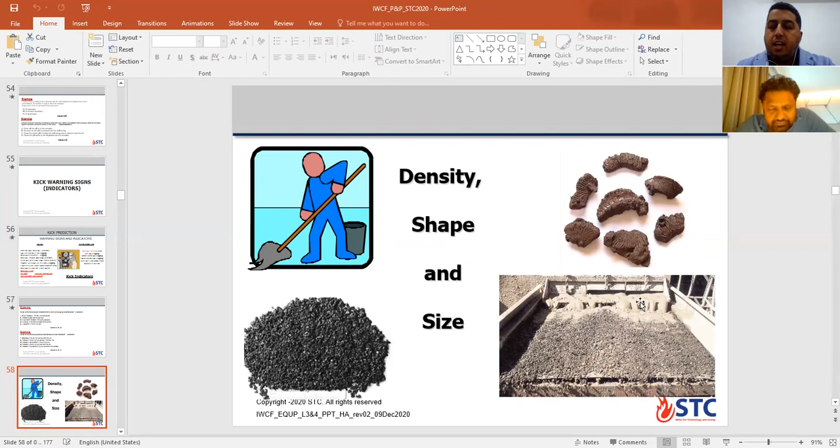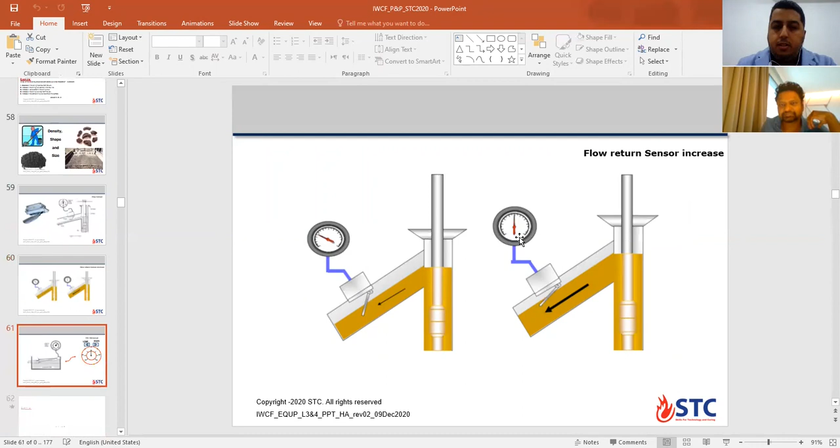And don't rely only on this sensor - rely also on the tank level from the measurement, visual measurement.

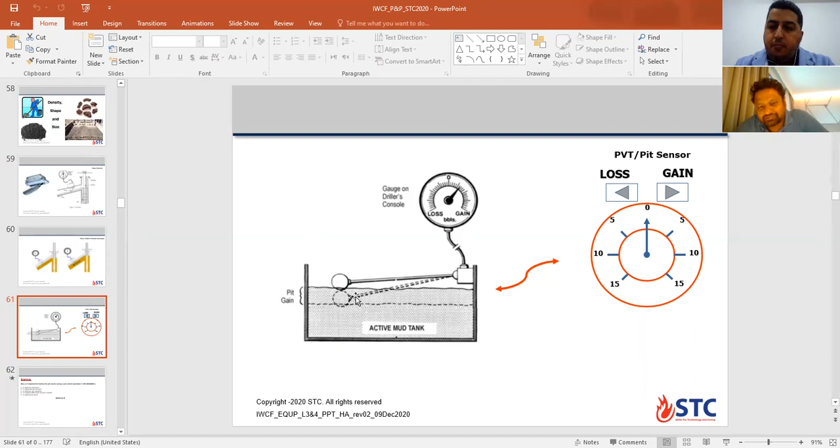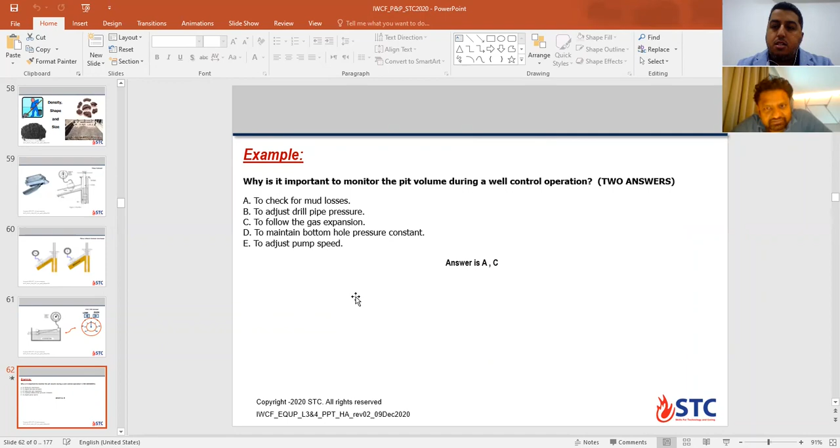To check mud losses, A is one, A is sure - to check for mud losses. B, no. C, to follow the gas expansion - maybe, yeah C also. Why C? Bottom hole pressure constant - when the gas starts to expand, it will push more mud out during the killing operation, so we need to measure the tank to follow this gas expansion, this migration.